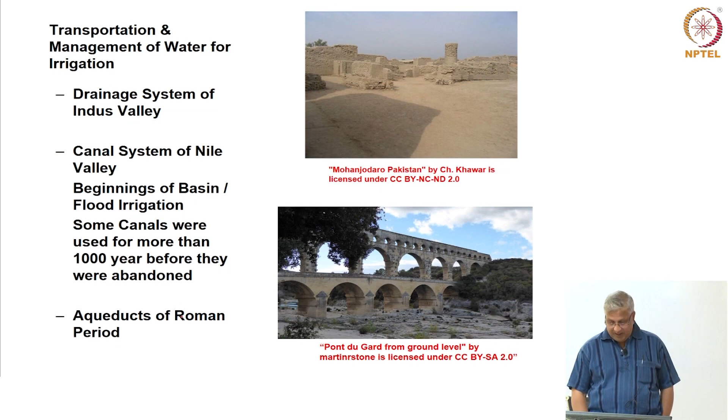And we all know about the drainage system for wastewater in the Indus Valley, and we also know about the aqueducts of the Roman period. There is another thing called qanats. These are basically used in arid regions of southwestern Asia and North Africa. These are about 3,000 years old, and they're still surviving. Iran has about 22,000 of these, which supply 75% of all the water used.

What they do in these qanats is, whatever water falls on the mountains or hills seeps into the ground, and then that blue line there, you see, is actually a tunnel dug into the mountain from the base of the mountain. They capture the water, the water flows in this tunnel and comes out of the mountain, and then it is taken through canals to wherever they want to use this water.

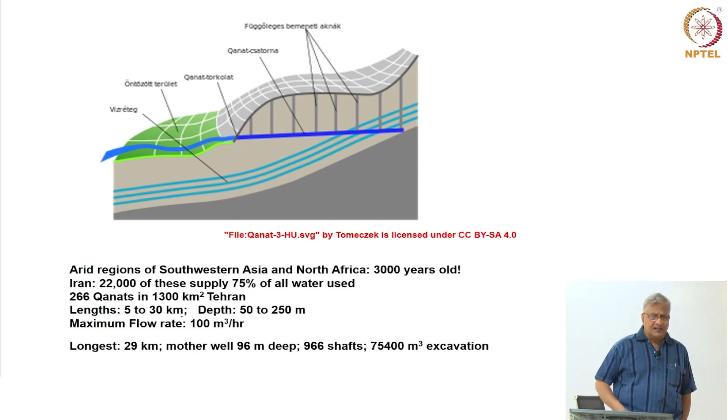These are called qanats, and they're about 5 to 30 kilometers in length, 50 to 250 meters in depth, and sometimes they carry as much water as 100 cubic meters per hour. The longest is about 29 kilometers. Some of these are still existing and working fine.

Some pictures of these qanats from the surface: there's a tunnel going underneath, and they in fact have manholes and things like that for inspection. All this is 3,000 years old, so it's not something that we have been doing only in the last few years. That's why I say hydraulic and water resources engineering is as old as civilization.

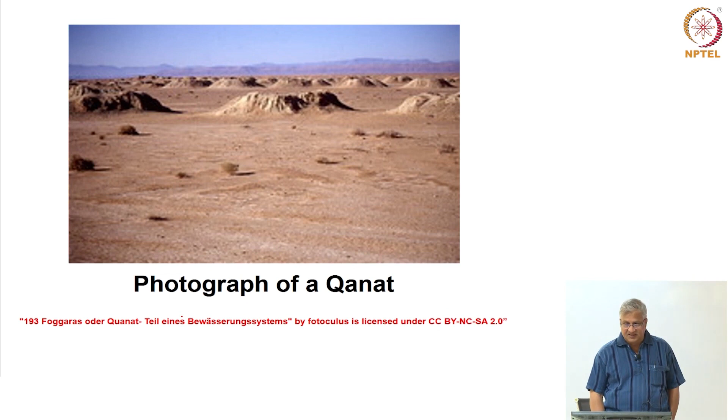Another important thing was that wars were fought for water. The Sumerians fought over water rights, who should get how much water, and you all know we still fight for water within states, within countries, and so on. There's an ancient Babylonian curse: may your canal be filled with sand. This is like cursing a society. If your canal gets filled with sand, you won't have water for irrigation, and the economy will be bad.

And then laws were formulated, or policies were framed. Like: a gentleman who opened his wall for irrigation but did not make his dike strong, and hence caused a flood and inundated an adjoining field, shall give grain to the owner of the field on the basis of those adjoining. That means people were aware of water law. Again, it's not something new that we are doing now.

The Mongols destroyed the Mesopotamian irrigation system. These days when there is a war, one thing they do is attack economic or infrastructure installations to keep the enemy's economic system down. So they were actually doing that to irrigation systems. The Assyrians also destroyed Armenia, but when they went to Armenia, they found that these qanats I was discussing a few minutes ago were pretty good. So they destroyed them, but they took the concept of qanats to Assyria.

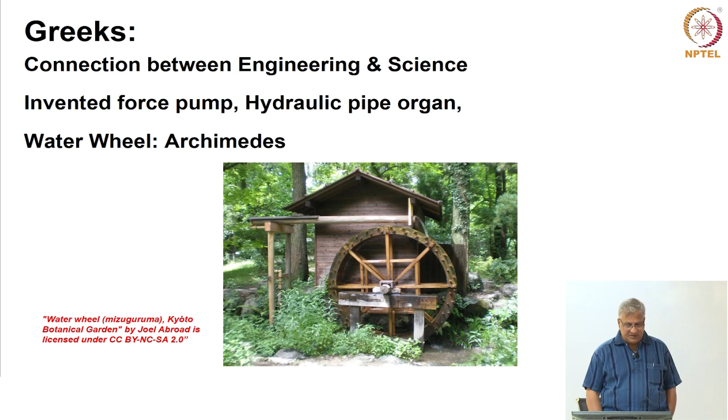So I'll just jump from there to the stage we are in now, the recent developments. Presently, as hydraulic and water resources engineers, we are concerned with ever increasing space and time scales. When I say spatial scale, you can say that I'm interested in what happens in, let's say, the IIT Madras Lake.

How much of water is there? How will I utilize this? That's the smallest scale that I can start with. And then I can also discuss what happens to the water resources, let's say, in the Ganga River Basin. So we say small catchments; we can think of studying hydrology or water resources in, let's say, the IIT Madras campus. Starting from there, we can go and then look at what happens in a big river basin.

And then we can start from a storm event. Let's say there is a 24-hour, 100-year rainfall, maybe like 300 mm of rainfall coming in 24 hours in Chennai in 2015, and what kind of floods it caused. So that's the kind of time scale, maybe a few hours, and then we can go to what happens to the water resources, let's say in the Chennai Basin or in the whole of India, if I increase the spatial scales over a season or over a year, say what happens in the monsoon season.

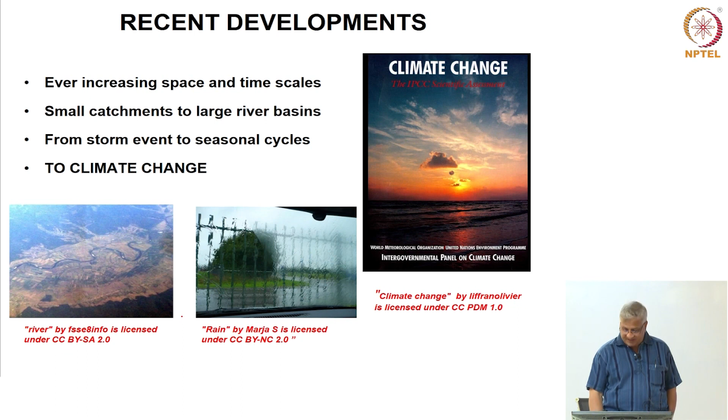How important water resources engineering is: from 1981 to 1990, the United Nations declared a decade for drinking water supply and sanitation, because millions lack access to clean water even now all over the world, and millions still lack access to sanitation services. You would be surprised to know that even in India now in 2019, only 30% of the wastewater that gets generated is actually treated before it is let into the environment.

And what kind of environmental degradation it would cause, what kind of pollution it would cause to our water bodies, what kind of stress we would have in finding sources for drinking water because of this pollution, you can imagine. In 1992, we had the Earth Summit, and the world at large has recognized that the Third World War will be fought over water and not over oil.

In this context, one good news is that India shares its waters with its neighbors, for example Pakistan, the water in the Indus River, and we have the Indus River Treaty, which came into existence in the late 1950s at the insistence of the World Bank. At the time, the World Bank was giving the money, and they said you two countries should sit together and develop water resources, which is a common resource for both of your countries, so you have to come to an understanding and a treaty. And this treaty actually survived all the wars we had with our neighbors. Everyone understands that water is important.

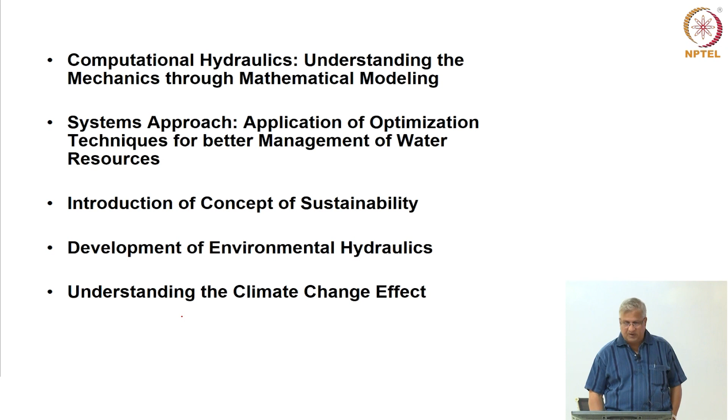Since independence, India has made lots of advances in terms of water resources. Right after independence, we started building dams because we needed to get food security. We went through a lot of famines, and we needed food security. That means we had to increase our irrigation potential and food production.

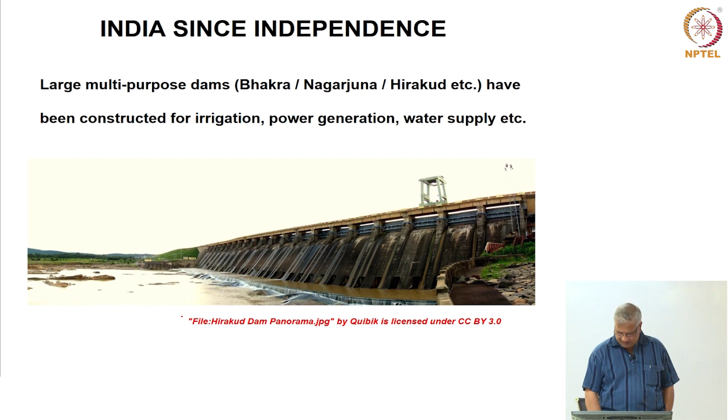In fact, the Damodar Valley Corporation, DVC on the Damodar River, is also basically multi-purpose. Most of these are multi-purpose large hydraulic, hydropower structure schemes. In fact, the Prime Minister at that time, Pandit Nehru, called these structures temples of modern India, and they were required at the time because they triggered the Green Revolution and self-sufficiency in food production, because by the early 1970s, India stopped importing food grains. Otherwise, we were depending on other countries for our food.

And there also has been a significant increase in hydropower development. And just to tell you how important hydraulic and water resources engineering is to the society and to the nation, Mokshagundam Visvesvaraya is the first engineer who was awarded Bharat Ratna, and in fact he was a hydraulic engineer and water resources engineer.

And in the early 60s, they realized the importance of hydraulic and water resources engineering for the development of the society, and Dr. K.L. Rao was actually made a minister. He is not a politician, he is a technocrat, and he was made a minister in the cabinet, Minister for Water Resources. Just to give you an idea about how important these things are.

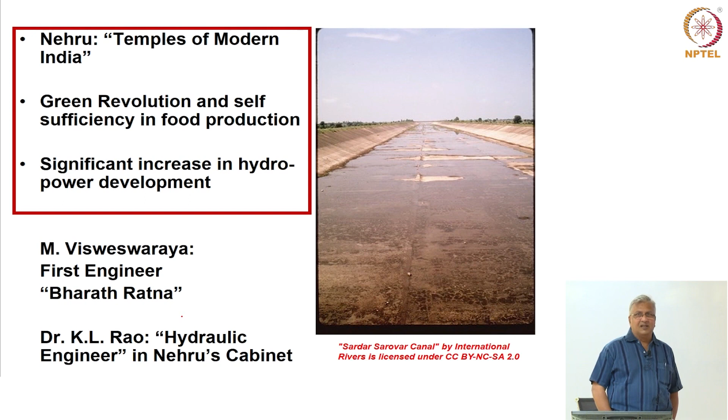And the picture that I show you here of the canal is what we call the Sardar Sarovar Canal. This is the canal which takes off from Sardar Sarovar Dam in Gujarat and supplies water to very water-scarce areas like Kutch, and probably some of this water goes to Rajasthan too.

So, the need of the hour, why we need to study hydraulic and water resources engineering, one thing that is of importance is urban infrastructure. When we say urban infrastructure, what comes to our mind as far as water is concerned is we need to get water supply to the houses. When you open the tap, the water should be flowing. And water should be available 24 hours and 7 days, 24/7 water supply, which is taken for granted in many of the countries in the world.

Unfortunately, in India right now, we do not have 24/7 water supply in any city. Only in pockets of very few cities is water available 24 hours and 7 days. For example, at IIT Madras, it is not that we don't get water in our hostels or houses, but water flows in the system only intermittently, and we are required to build our own local water storage structures like sumps and overhead tanks. These get filled maybe once in 2 days or once a day, and from that we draw the water 24 hours a day.

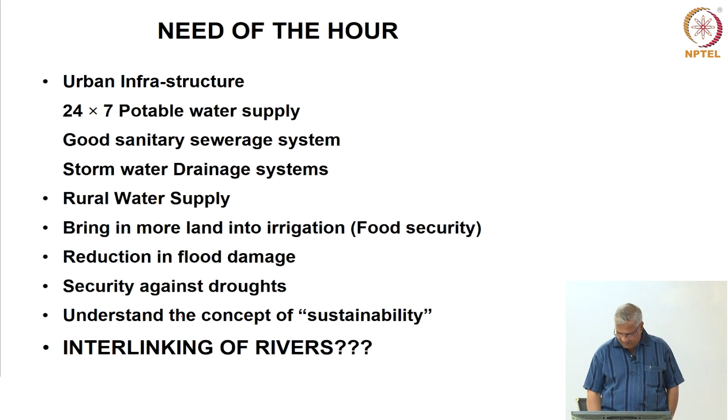So in this context, in India they have been talking about interlinking of rivers, that is, interbasin transfer of water. In fact, they have been talking about interlinking of rivers since 1960. We haven't yet implemented it. And the reasons why we did not implement it and why we still discuss it become apparent when you see these points.

We need the interlinking of rivers. The people who root for interlinking of rivers have arguments which are, of course, right. Occurrence of droughts in several parts of India is very frequent. In peninsular India we have lots of droughts, and in the western part of India also we have lots of droughts. We don't have much rain, we don't have much water, and the projected population of the country is going to be 150 crores, that is 1.5 billion, and we would be the most populous nation in the world soon.

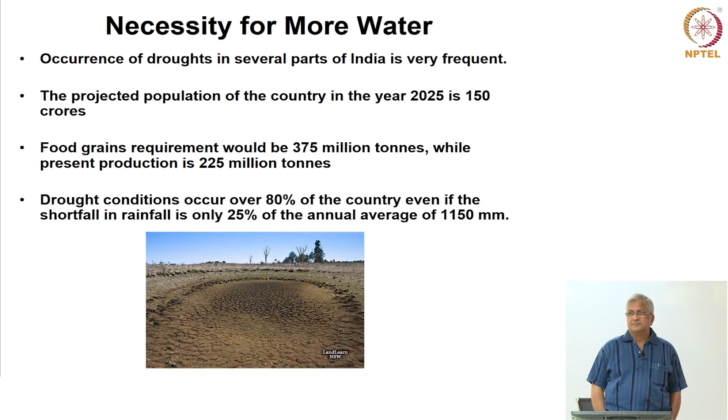Food grain requirements would be 375 million tons, while the present is only 225 million tons. So you have to see how much improvement we have to make in our agricultural sector. And droughts occur in 80% of the country even if the rainfall shortfall is only 25%. So imagine what the consequences of this are.

And at the same time, we have floods in other parts. Like droughts, floods are very frequent, and they occur simultaneously. Another important thing is, because of the weather conditions in India, 85 to 90% of the entire runoff, which is the water flowing in the rivers due to the rains, occurs in 4 months. Out of 12 months, only 4 months you get the rainfall.

We have such a vast area and so many rivers, but only 2 rivers, Brahmaputra and Ganga, account for 60% of India's water resources, and everything just goes off into the sea. We are unable to store that water, we are unable to divert that water.

Whereas in peninsular India, some rivers like the Palar river, which is south of Chennai, between Chennai and Vellore, flow once in 5 years or once in 10 years when there is rain. Many times even that is not there; all you see is just sand. Large tracts of land need to be brought under irrigation, as I already said.

So they said, why don't we do a mega project? We have a lot of water in Brahmaputra, and this water is causing a lot of floods in the downstream areas in Assam as well as in Bangladesh. So why don't we divert this water from Brahmaputra and put it in Ganga? You build a huge canal and put it in Ganga, and now we have excess water in Ganga.

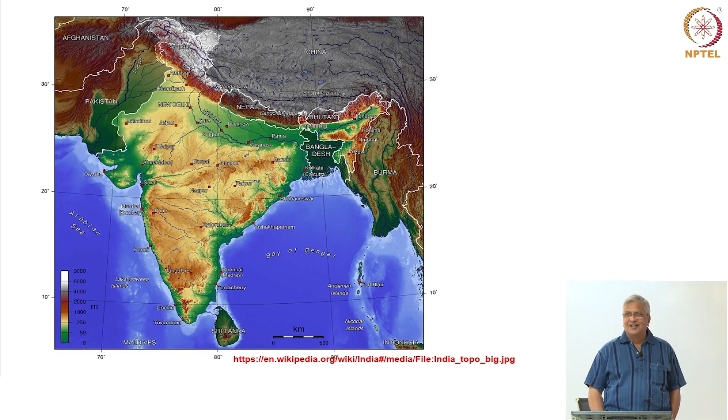Then just because I put the Indian map like this and draw one link from north to south doesn't mean that the water will flow down south. It all depends upon the topographical conditions we have, the levels we have, ground levels we have, and so on and so forth. So, for example, if I want to take it from Ganga to Narmada and then below, if I want to take that route, then I have the Satpuras and Vindhyas coming in between. So how do you cross them?

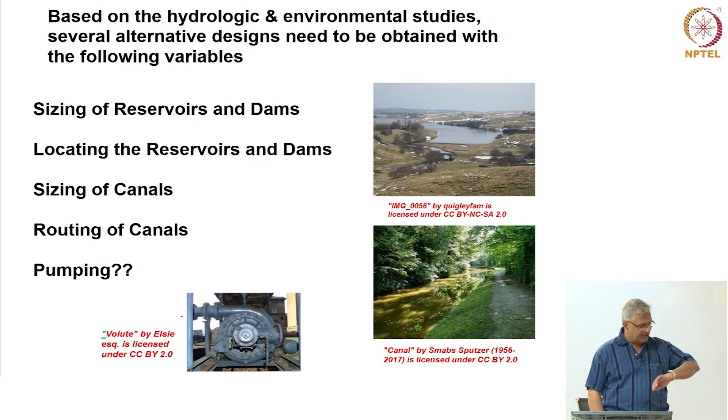You want to put tunnels, or you want to go and put pumps. So many times we may need to pump water from one basin to another. Then in that case, what should be the size of the pumps? That becomes an important question that hydraulic and water resources engineers would like to answer. This is one issue, the engineering issues, but we cannot run away from the other issues, because of constraints: you need land and land acquisition.

We were working with the Kerala government back in 2016 and we came up with one alternative, saying that there is a link canal which takes the water from one of the rivers to the Arabian Sea. We said, why don't you just increase the width of this link canal to maybe 300 meters, and we were asking only for about a 20 kilometer stretch of this canal, and then probably we can divert a lot of these flood waters, and in the Kuttanad area we can solve the flood problem.

We gave that idea, and in fact it was a meeting with the chief minister and all the technocrats and everybody. They said, very nice idea, but we cannot go in and implement it, because we will never be able to acquire land in Kerala, because land is very, very costly. They won't sell the land. So land acquisition is a problem.

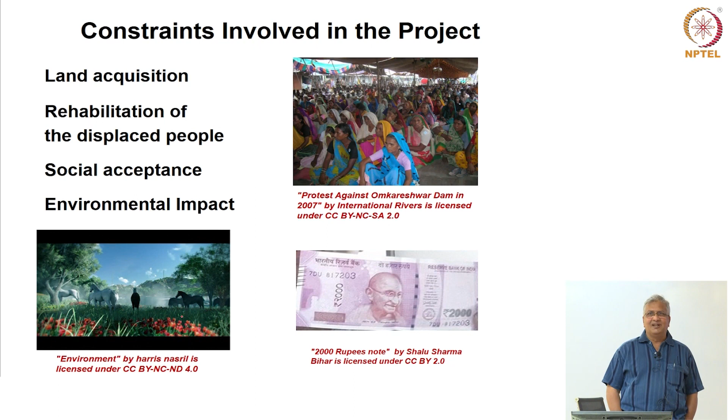So, I'll just take 1 minute. To summarize, we need to understand mechanics of water flow, that is surface and subsurface water flow; hydrology, basically gathering, management and analysis of data, water flow data, rainfall data; then systems analysis. And of course, whenever you study nature, you are not completely sure how Mother Nature behaves. So there is always uncertainty, and whatever projects we bring in have to have reliability. So uncertainty and reliability concepts we need to understand, and water economics, planning and financing of water resources.

These days, as hydraulic and water resources engineers, you probably also need to learn about water law to settle disputes between different parts of the country and different parts of society, and water resources quality, fate and transport of pollutants. So these are all very exciting areas, either to do research or to be in the profession, because India is going to invest very, very much money into the water sector. It has to, if it has to survive in the future.